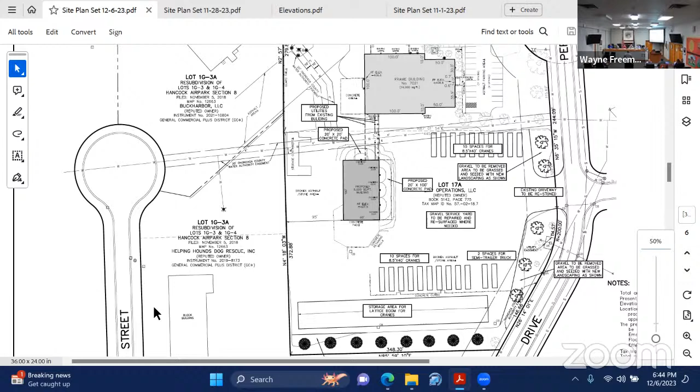Would somebody like to make that a motion? I'll make the motion. Second. Mr. Duval, yes. Mr. Abbey, yes. Mrs. Hogan, yes. Mr. Bloss, yes. And I vote yes. Thank you very much, I appreciate it. Thank you, Tim.

Moving on to the second item. This is a site plan review for a proposed pole barn at the property at 6341 Island Road, with the representative of the applicant, Ianuzi and Romans.

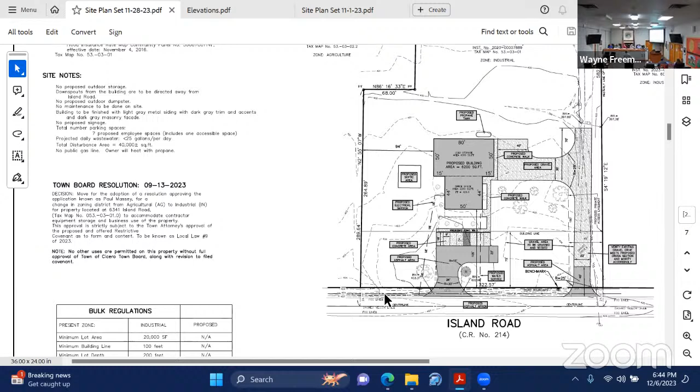I don't know if you recall, we were here a few weeks ago. We originally had the entrance coming up through here, with a wraparound garage or gravel drive in the access area to the back. With the board's comments and concerns, we pulled the building forward a significant amount and put all the parking in the front of the building. Now we're going to utilize this existing, slash redone, gravel drive to get to the back of the building.

The applicant is here if the board has any questions for Mr. Massey. It's a storage area to store his landscape company's equipment. He doesn't necessarily have specific plans immediately for the front, but we do show a floor plan that he can potentially build out and utilize for his existing landscape company.

I added a note about the approvals from the town. He understands that nothing else can be put in this building until the covenant is possibly changed and approved by the town board specifically, if and when he does something different with the building in the future.

Other than that, the main changes were the parking in the front with some concrete at the actual spaces, and again this gravel drive in the back. We have the access easement proposed for this existing gravel drive that somebody else is utilizing in the back, which we discussed last time, so we don't have a problem doing that. We satisfied the fire department's concerns with fire flow and the building's relationship to the hydrant.

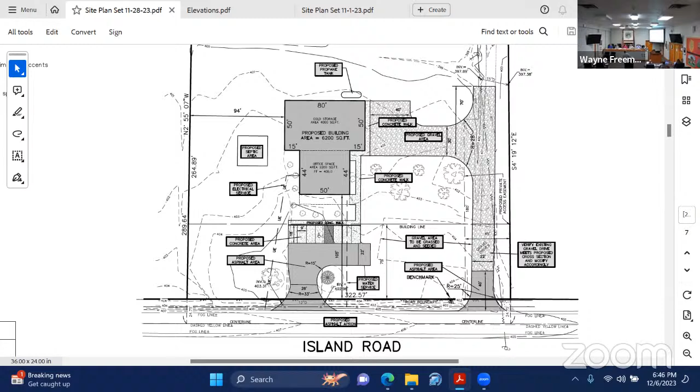I think that was most of the changes, and we do have a 40-foot asphalt apron for the gravel drive. But otherwise, for the changes to the building facade itself, we have 2 plans. I just want to make sure what the board thinks of these plans.

One of them shows a masonry veneer along the base - that's the initial option. The other option the applicant was talking about is the face of the building being fully masonry in this area. He doesn't really have a problem with either, but he thought this would look a little better.

Does the board have any concerns or comments either way with the elevation? Do you have color samples? I don't have color samples, but it's gonna be a dark gray stone and a lighter gray building - literally just a charcoal gray. It's a charcoal gray stone veneer and a lighter gray building siding. I think it'll look pretty sharp with all the landscaping we proposed.

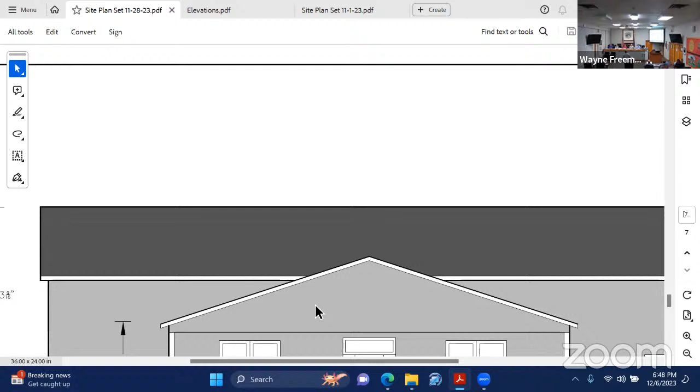Can you go back to the last one, Mark? I like seeing colors. I can try to get some color samples if the board wants, but it's just charcoal - but I agree.

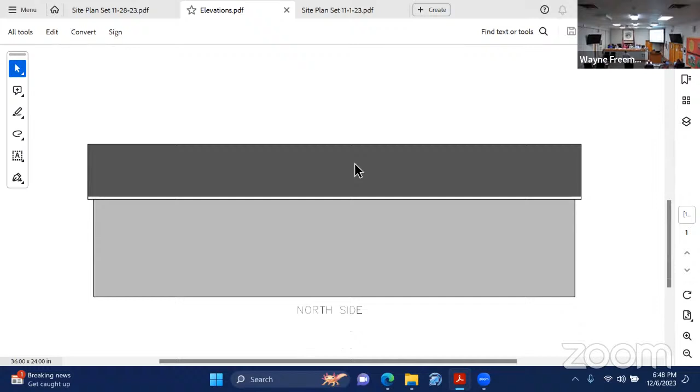Any thoughts on the 2 options for the elevation? Can you show me the other option again, the one where it was... so those are just the 2 options, either full masonry or not, or just a half. The masonry is gonna be a darker gray charcoal color, it didn't come out very good on this picture.

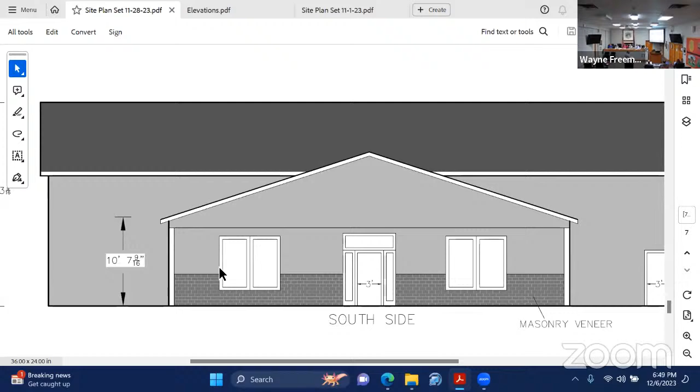How dark, like the roof? Mr. Massey has pictures here. Was this cold masonry wrapped around? No, it's just for the front. This option, we would wrap it around the office, but on the other option, we'd only do the front.

I like that it goes onto the other side with that one, that's the only thing. I like the stone on the front, but I like that the other one wraps around on the other side. I like the other one better, where it wraps around. I think so too.

Okay, so everybody likes that. What about the front? Well, they're probably trying to limit the amount of stone to save expense - we were trying to do one or the other, to be honest with you, but you can't have both. More stone is more expensive probably.

I like the full front and wrap around the side half, but that's just me. I just think if you totally leave the other side, it looks unfinished, and then it leaves the whole side looking unfinished.

In addition to running the same color - just a charcoal gray on the bottom side. Same color, same color. Black shutters?

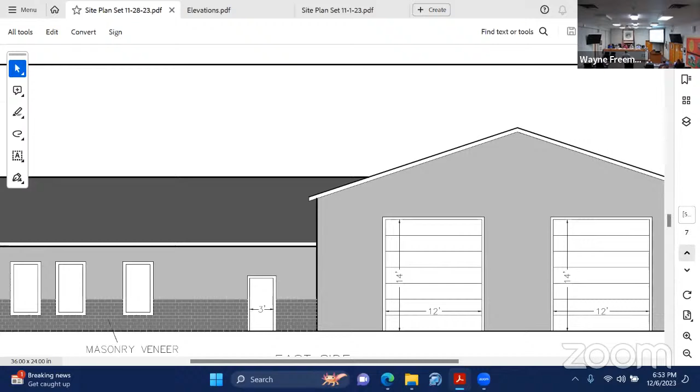I'm good. Chuck? Tim, I was curious about this drive - is that the one that's already existing? It goes back to the house in the back? Yep. Does that belong to this property or to the rear property?

So we kind of talked about this. There it is. There we go, all right. So most of this drive actually is existing. It goes all the way back to the back of our property. It actually continues farther north to another type of cabin that's way in the back - and it's not necessarily the next adjacent property owner, it's even farther back, like a landlocked piece of property that someone's utilizing. But yes, this driveway is existing through here.

And on the proposed building, the front section says on the plan here, office space, 2,200 square feet. Did you say it was just gonna be cold storage? No, cold storage in the back, and office space in the front, to be used as office to begin with. Not right away - he doesn't have any.

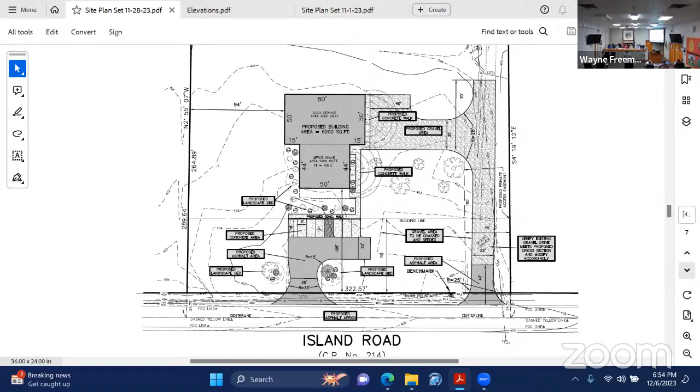Does that mean you're gonna have facilities in there now, or just sometime in the future? If he doesn't plan on utilizing it immediately, no, but in the future he's allowed to utilize it for his office, only for his own use - that would be the only time he can utilize that office. He can't give it to somebody else to use; he'd have to come back to the town and get the covenant changed and reapproved for somebody else to use it. Okay, I was just thinking electricity and gas - yep, we have all the utilities going to it. Great, and plumbing. Yep, thank you.

And so just to confirm, the apron part, is that going to be blacktop? Yep, this is asphalt, and this is actually concrete in here. And so when you show us those pictures, the office is in the front, that's what we're talking about? Yep, and then that's in the back. So is there only just one entry point, or an entry through the office? No, you have an entry point here, and there's another office door right there. And then we'll have a couple few doors off in the warehouse area, shown on the other plan. Okay, so just like normal doors though? Yep. Okay, that's it for me.

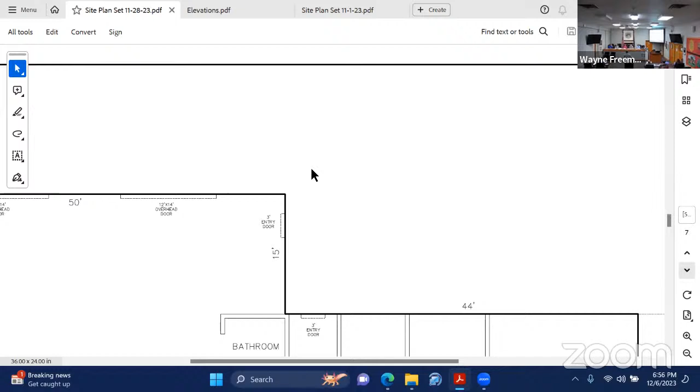Thank you, I'm all set. Tim, when we talked last time, there was some discussion about the use and whether or not plows would be driven back and forth daily, or if this is just an off-season storage kind of thing. It's off-season - nobody will be there, everything's off-season, correct. There's really gonna be no people at this site at all. So in the winter months they'll be storing the summer stuff, and in the summer they'll store the winter stuff. Yeah, that's all I have.

Steve? No, just that this site is similar to the previous one we just reviewed, in that the fire department is gonna have to use some existing gravel drive here for access, and we'll want confirmation and verification of its adequacy to support the fire equipment. And you'll do that on your end? Yeah.

Color scheme, rendering and color mix.

As presented by the applicant, the planning board application must substantially conform to the items presented herein. Two, the applicant shall present the planning board with the framework for a proposed easement for ingress and egress along the area noted on the site plan as proposed private access easement. Once approved, the applicant will cause the easement to be recorded with the Onondaga County Clerk and provide the planning board with proof of recording. No certificate of occupancy shall be issued prior to the receipt of the filed easement. Three, the masonry effect will include a full front wraparound as presented by the applicant.

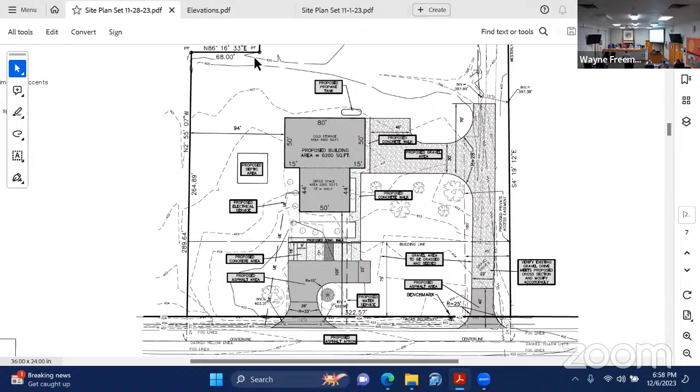Have a good night. Good, good luck with it.

And the last agenda item is again a site plan review. This is a proposed warehouse extension for the Pepsi plant over on Pardee Road. Welcome back, thank you.

Good evening, Scott Freeman and Nate LaPierre from Keplinger Freeman Associates. We brought our whole team here. Thought it'd be a good opportunity for Mike Moringer, the plant manager, to introduce the project and give a brief summary. Also with us is Scott Shova, he's with CNS, the construction manager and doing the architecture for the project. Those slides are included if we want to reference those. We have Rachel Altmeyer, Luke McKinney with Ambient, and Brian Baer with CNS to assist with questions on the wetland permitting, and we have on-site wetland mitigation areas that we're working on. So Mike, let us know about that.

Hi folks, we're back. Good to have you back. How are you tonight? Good, thank you. How you doing? We've made a lot of progress on this project. First, let me introduce myself. I'm Mike, I know Scott introduced me. I'm Mike Moringer, the former general manager of Clinton's Ditch.

I retired in April, but I'm kind of semi-retired because I'm staying engaged with the ditch, not only on this project but on some other things. John Dunn is my successor, and John would have been here tonight, but he had a board dinner that was long previously planned, so he had to be at that tonight. We have a board of directors meeting tomorrow. Hopefully I'll be able to give him a good update as to where we're at with the project.

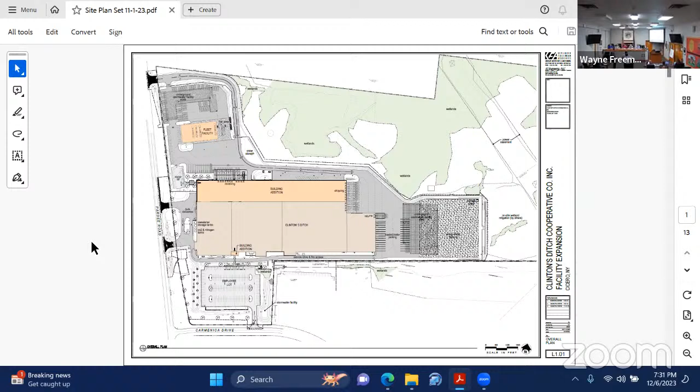That concludes our agenda items. Are we going to be discussing the outstanding items that have been hanging around for a while? I know there was some discussion on that.

I think we just need to contact the applicants. There's some old ones, yeah, those projects. If not, you know, typically, Neil, you send them letters. Is that what we're going to do? Send them a letter asking for, or giving a deadline, and say, now we consider your application lapsed.

Oh wow, that's 5 or 6. Yeah, and they said they're going forward. 5 or 6. Are you good with who you're going to send them to, or do you want us to go through that? Yeah, we can work on and get that list, sure, provided.

That works. Any other questions or comments from any of the team? Yeah, I had a couple for Steve. Go ahead, Steve. Steve, I was just curious, I've been gone so long, I'm uninformed about a lot of things. I was just curious on the latest on Dave's Hot Chicken, for example.

That's progressing along. Yeah, they have a building permit and they've started to do their alterations and renovations to the building. We're just waiting for a new sewer lateral connection, and the DOT is holding us up on a work permit a little bit. It's been taking a while, but they've started the work on the outside.